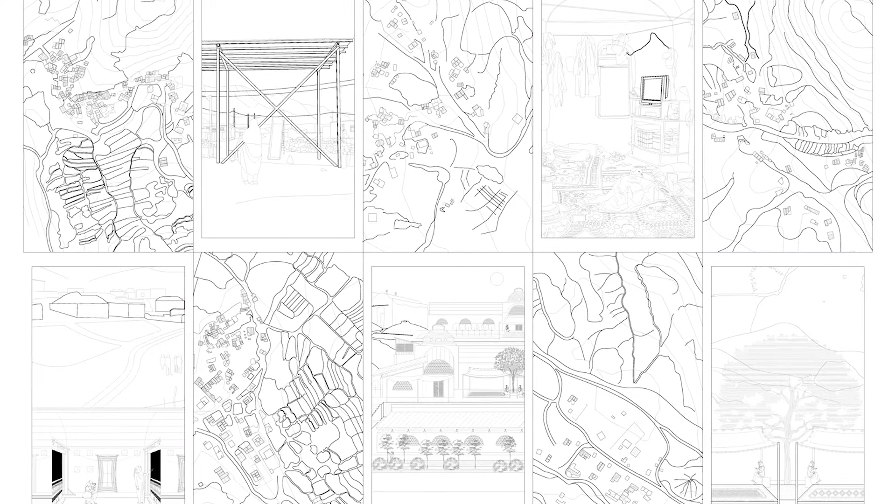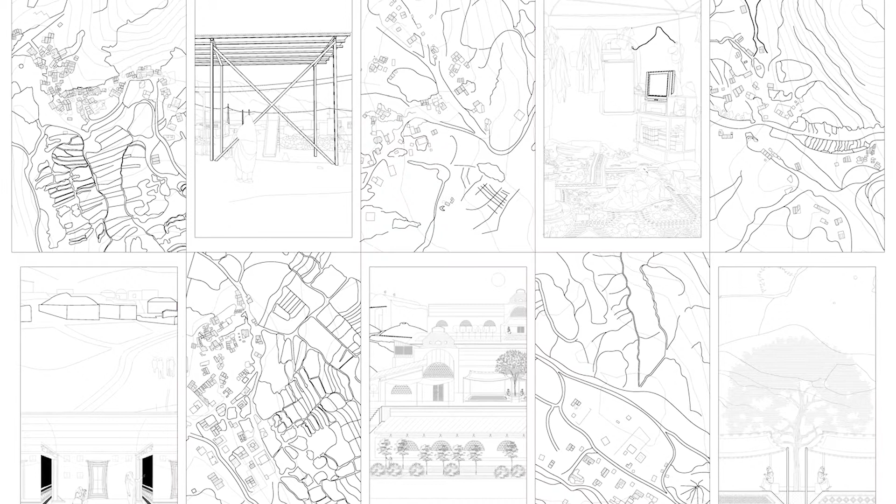A cluster of villages situated in the South Khorasan province of Iran offers the possibility to metamorphose the way in which we interpret the rural landscape into something that responds not only to the people, but also is a vocalization of its demography and geographical settings.

Mountainous terrains, changing climate, migration, and a persistent decade-old drought are just a few of the challenges that this cluster of villages face. To objectively acknowledge this ever-pervasive state of crisis is the first step, and the second, while subjective, becomes a personal narrative into a journey of rediscovery of interpreting so-called non-modern design interventions into the rural fabric, which are inherently participatory in nature.

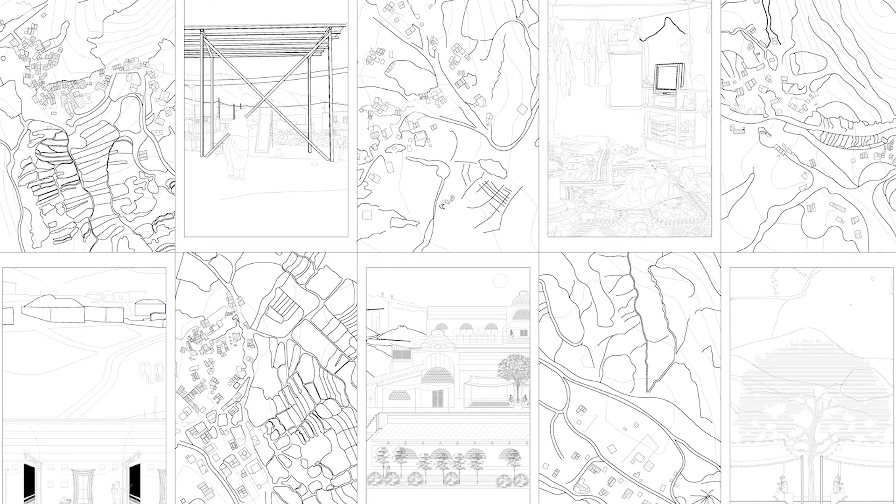A lack of attention, consideration, and solidarity has led to the continuous disintegration of the rural fabric, resulting in interventions such as this within it that are more than often superficial and unfortunately one-dimensional. What seemingly works in an urban scenario cannot be superimposed onto the rural landscape without thought and understanding.

The nebulous forms in which this crisis exhibits itself then range from poverty, unemployment, lack of housing, and so on, which is critically related to that of the disintegration of the urban fabric, or paradoxically, the absence of one.

Initially, the journey began as a collective group of master students coming from diverse backgrounds trying to understand the state of crises that existed in different regions of the world. With the European Spatial Agency database website becoming an integral part of this discussion, it offered us an alternative approach which shifted focus from the architect's traditional role in designing spaces towards a more expansive field of opportunities in which architects and non-architects not only could operate, but could also successfully collaborate.

Works of Francis Kéré, Hassan Fathy, and Nader Khalili from the ESA database were what struck a personal chord with me, as they were true testaments of architecture as a socially transformative process, which were participative from initiation to execution in their assimilation with the rural fabric.

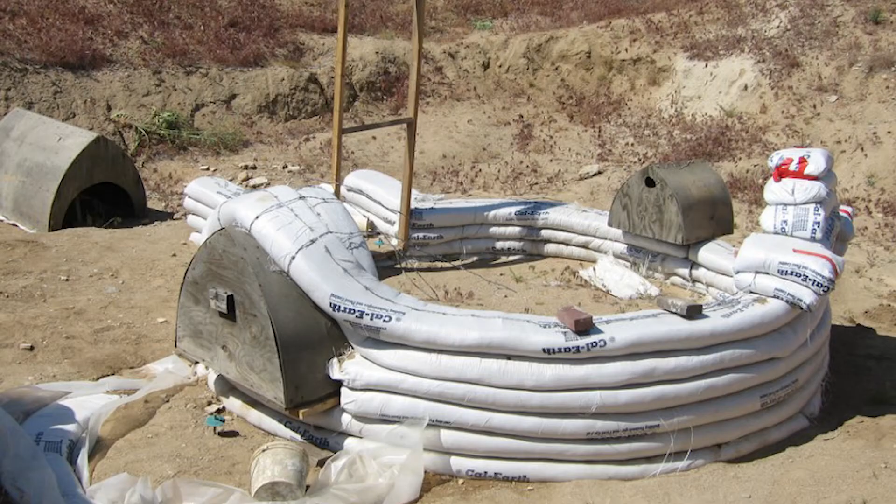Ideas of adaptive construction techniques weaved together with holistic vernacular architecture within a region-specific approach was a common theme shared amongst them. With subsequent discussions and debates within the group, a trio of crisis sites in China, Belgium, and Iran respectively was selected, from which each of our individual journeys commenced.

Iran, specifically the South Khorasan region, became the canvas of my explorations into the urban fabric of this crisis-affected region. Stephen Moore's approach of regenerative regionalism offers an alternative way, one that is so-called non-modern, but at the same time focuses the spotlight on important elements such as place, region, society, and technology.

This, with ideas of inclusive participatory processes, allows for an approach that reinterprets the rural fabric of the five villages in question, with an intention that this intervention proposed is just a canvas, a module from where participatory processes can be initiated. The five villages.

The five villages in question, Mortik, Rezek, Zekri, Golenoy, and Kalte Baluch, are located in South Khorasan, a province situated in the east of Iran, close to the Afghanistan border.

Low relative humidity is a common feature of this arid desert region, with temperatures ranging from minus 13.57 to 46.83 degrees, accompanied by a dry and hot summer.

The five villages, which are in relative proximity to each other, are far away from cities or urban centers like Tabas Masina and Sarbisheh. Added to the distance is the mountainous desert terrain, which is difficult to navigate, making traveling arduous and hence resulting in severe limitations with their connections to the outside world.

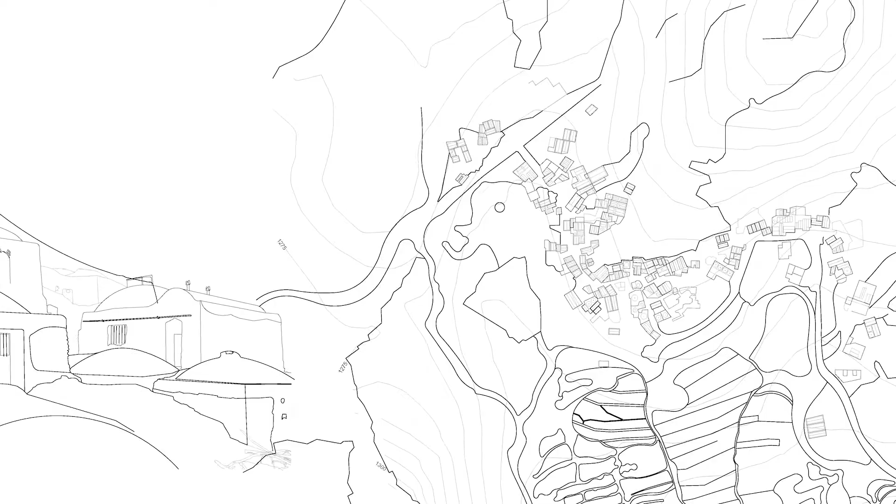Before any intervention can be thought about, an attempt here is undertaken to decipher the rural landscape and reveal the essence of its urban fabric in an architectural language.

The intention is that these drawings reveal not only what exists on site, but also what possibilities might arise when viewed from the eyes of the spectator.

An important element that stands out in the interweaving landscapes created between the regional architecture and the geography are the overhanging electrical lines. This shows that technology and its advancements have also penetrated the semi-isolated rural fabric to quite an extent.

The five villages share similar traits in terms of terrain, urbanistic patterns of evolution, the very visible electric network, and regional vernacular architecture. This becomes a basis to propose a regenerative framework that can either function independently by adapting to the context or form an interconnected network with the rest of the villages.

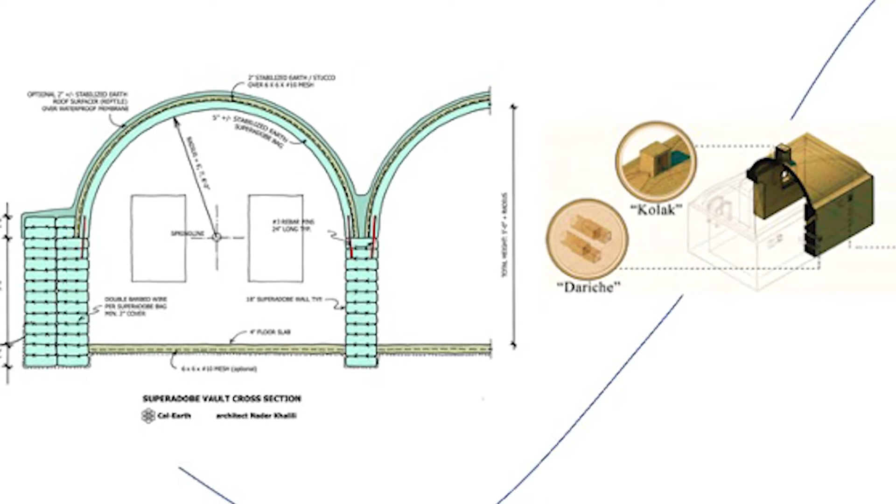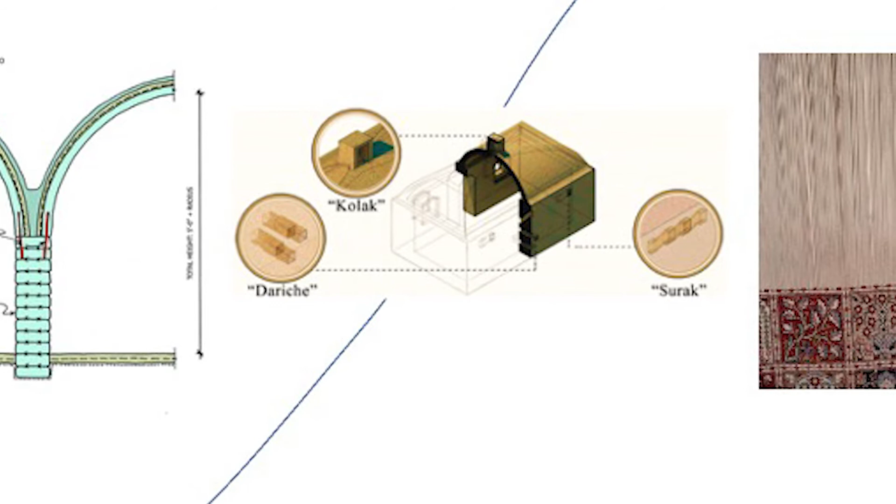With Nader Khalili's brainchild, the super-adobe construction, becomes the basis for the proposal ahead, as it can be done in the absence of skilled labor with a bit of training. The advantage of this construction method is that it is not only built entirely from locally available, environmentally friendly material, but also allows for a flexible and more spatial layout.

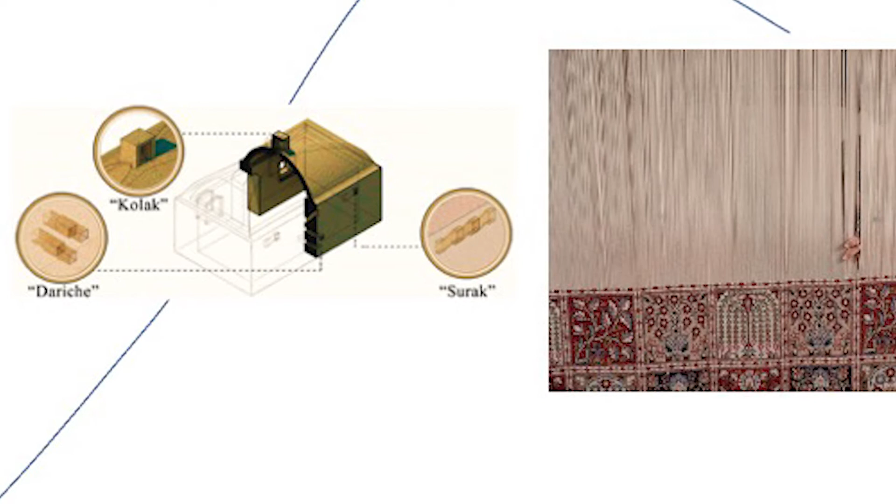With the help of super adobe construction, in combination with vernacular construction techniques and materials indigenous to the region, it is possible to generate spaces that can be modular enough to adapt to the requirements of the people.

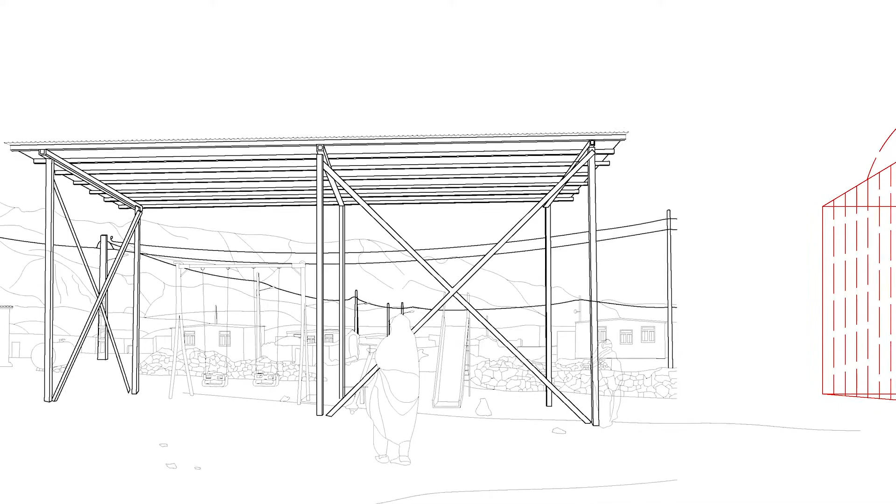While the initial idea was to propose a working space where women could practice their weaving and carpet making activities, it became imperative that the intervention should also be able to meet the other needs of the people. Hence, what arose from this was a process where an existing structure, a small covered play space lying desolate in the middle of the rural landscape, became the progenitor to evolving and interweaving a work, learn, live space around it.

Ideas of accessibility, covered spaces, and transitory journeys are explored in the proposed framework. Due to the prohibitive cost of mechanical cooling, the entire design reverts to vernacular methods of providing natural cross ventilation. For this reason, a combination of barrel vault and dome construction is proposed.

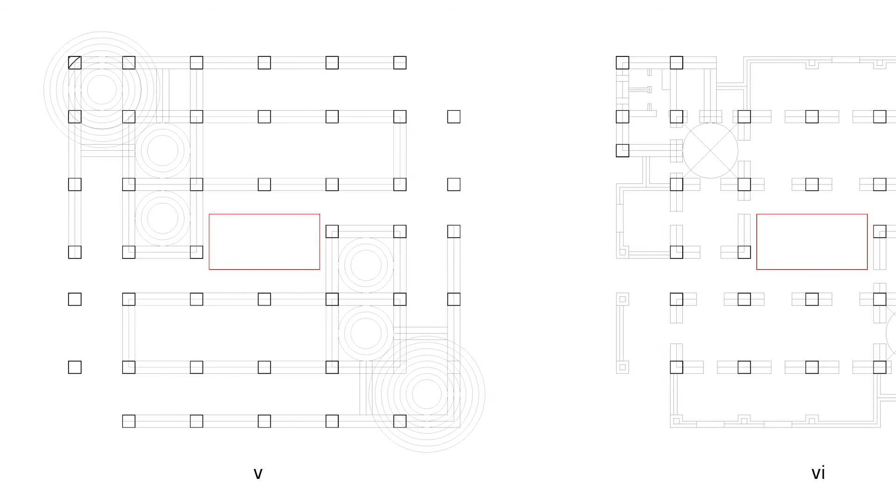A wind catcher with an inner water cooling plate is provided on either side of the central space to allow for cooling and cross ventilation during summers.

While the proposal gives priority for spaces to women to carry out their weaving activities, it can also be further adapted as primary education or a cooperative vocational housing facility.

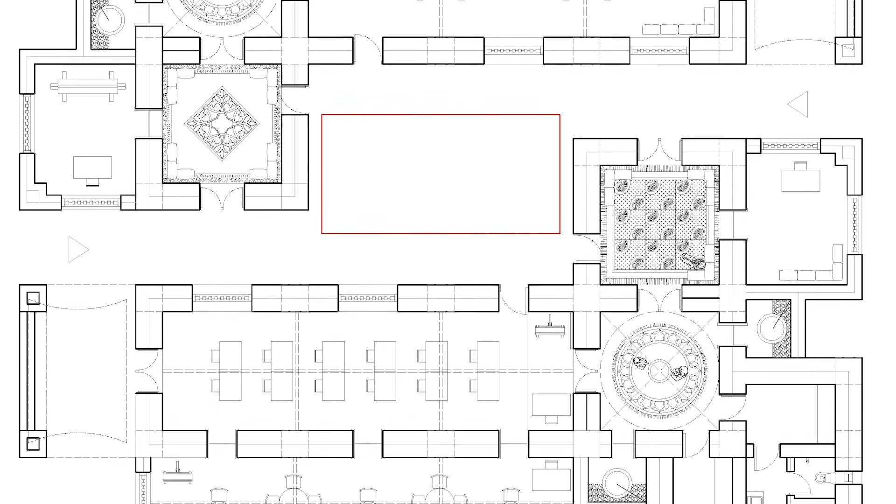Each of the spaces proposed is further divided into sections, which in turn creates a rhythmically derived approach as the eye moves from the exterior and towards the interior.

While entrances are provided from two sides, the central play space or courtyard acts as a temperature regulator for the surrounding spaces. These courtyards can further be customized into sitting areas during cooler parts of the day by using reed mats and carpets. These courtyards then further act as social gathering spaces for the women.

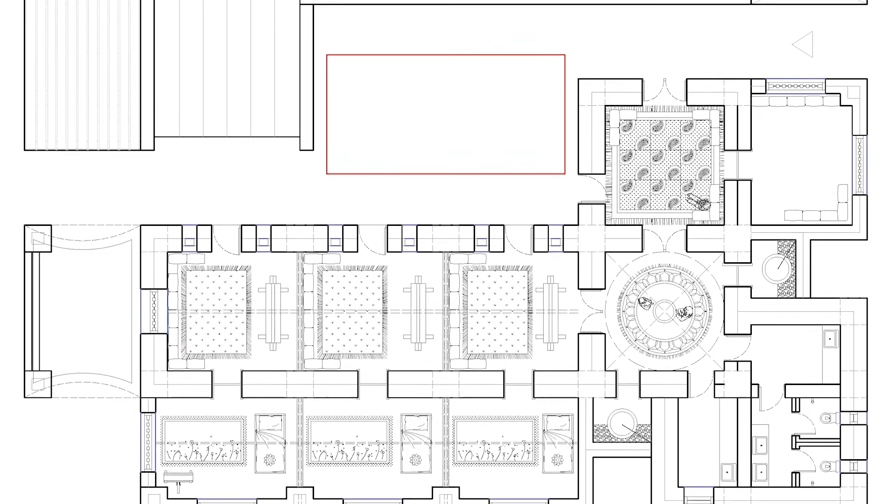The proposal maintains a utilitarian expression in its aestheticism. This allows for it to be modified by its inhabitants and hence personalize their living environment. The sections allow the user to portray multiple views of figures and landscapes simultaneously.

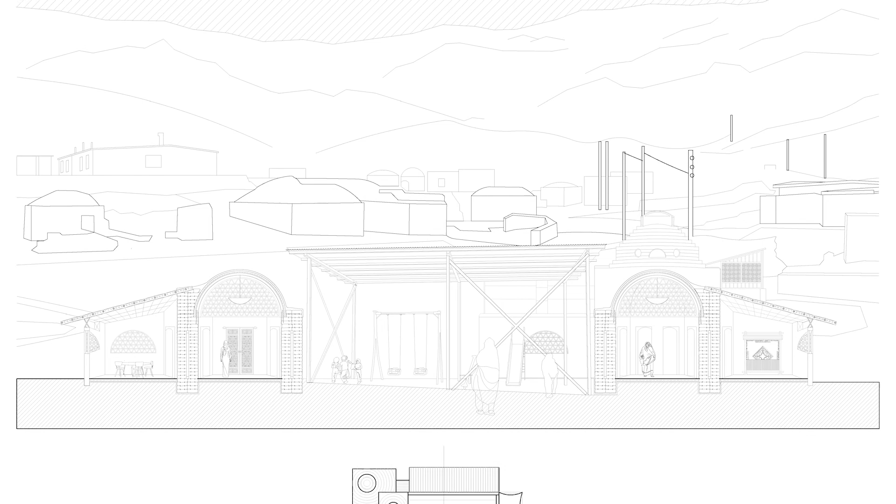The proposal weaves itself into the surrounding context and becomes a part of the rural fabric, resulting in a spectral translation of the proposal and its surroundings. The drawings act as a human scale intermediary in allowing for a mix of gradual and dramatic changes in scale from one part to another.

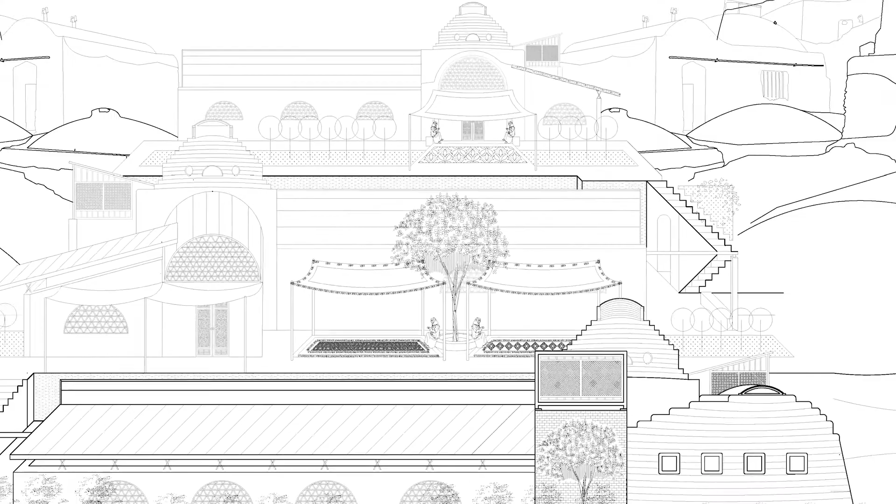The modularity of the sections indicate that it can be adaptable to different levels and hence different degrees of activity spaces can exist within. Conclusion.

There are more ways than one to intervene in the urban fabric of these villages. This narrative is cognizant of that fact. The visually narrative and subjectively interpretive drawings shown here are a means to reintroduce the notion that architecture can become once again a source of vitality and resiliency in the region.

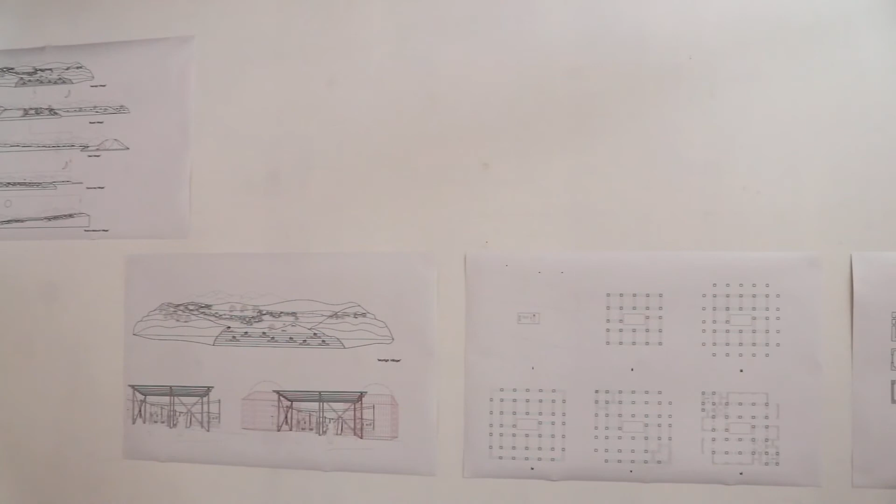Traditional architecture and indigenous historic forms thus becomes the basis on which modern design techniques and processes can be implemented in the design of the built environment in the rural fabric. In this way, technology in its true sense gets utilized for the people.

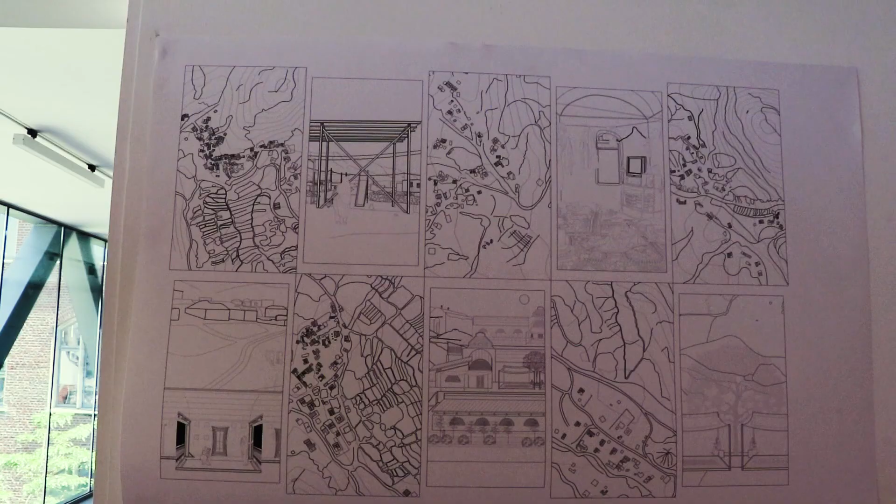At the same time, this narrative becomes an interpretive solution to mend the ever-growing tears in the rural fabric, and hence does this by respecting the cultural and regional context it is settled in.

To conclude, while the situation is dire, there is still hope. The modern approach undertaken here looks at the past for inspiration, utilizes the energy of the present, while expectantly anticipating the future. Thank you.